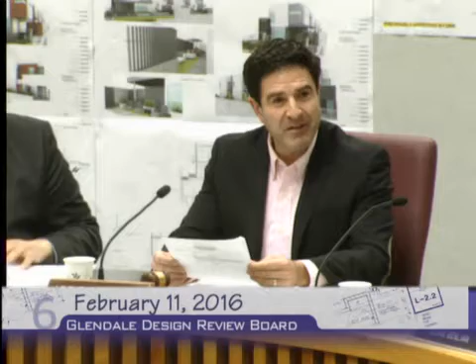Good evening and thank you. The applicant is proposing modifications to a project previously approved by the Design Review Board in May of 2014 for a new 4-unit townhouse-style multifamily building.

The building is located at 440 Palm Drive in the R1250 high-density residential zone.

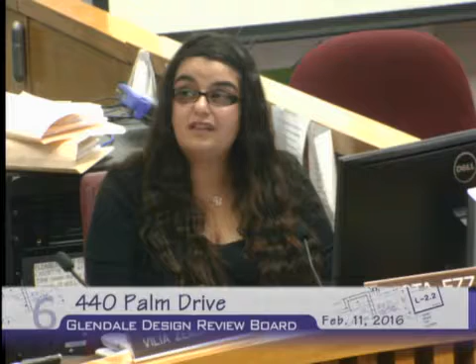The primary request is to amend the approved cladding materials from wood siding and corrugated metal to stucco for the contemporary style project. The proposed modifications could not be approved at the staff level, and they do require the Design Review Board's approval.

The proposed modifications include changing the approved cladding materials for the facade to be smooth stucco in varying colors, where the board previously approved IPE wood siding and corrugated metal wall panels.

Also changing the approved mechanical screen material to a smooth stucco wall that is flush with the building, where the board previously approved metal screening set back from the building wall.

Changing the natural stone and Corten steel planter wall materials to CMU, and changing the design for the painted metal fence and the Corten steel pedestrian entry gate to a simple metal fence and matching gate.

And changing the design along the west elevation to omit the protruding beam adjacent to the seating area to the north.

Based off the proposed modifications, staff is recommending the project be approved with conditions as noted in the staff report. The applicant's request will not alter the site plan or footprint of the development that was previously approved.

Privacy concerns for Unit D have been appropriately addressed as conditioned by the board when this project was last reviewed. The height of the windows at the rear for this unit have been raised and placed higher on the wall.

The entries to all the units remain along the east elevation, with each entrance recessed to achieve a covered entry area. The simple slab door is proposed to be accented in green with a frosted glass side light.

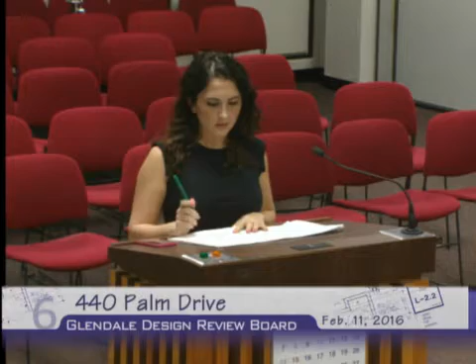Welcome. I just want to add one more item that I forgot to mention: on sheet A109, there is a green screen trellis system on the left bottom corner. That's also going to be removed, it just wasn't updated in the plan. It's actually along the back wall where the seating area is, on the side where the patios are for each unit, not where the entrance is on the other side. That's just another item that was going to be removed.

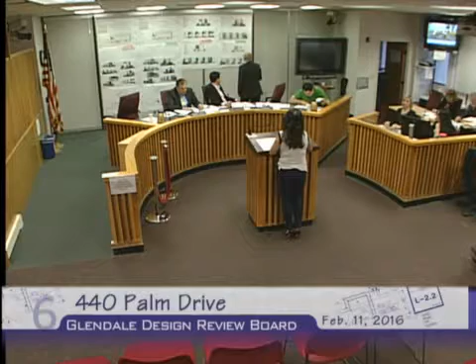Do we have questions for the applicant? Actually, I had a question. I noticed these gadgets here - I'm assuming these are all the AC units. Are these the AC units? They are. From that other side, I don't see it. In that view that you pointed out, it's all the way in the back against the other parapet, and it just shows on that elevation graphically.

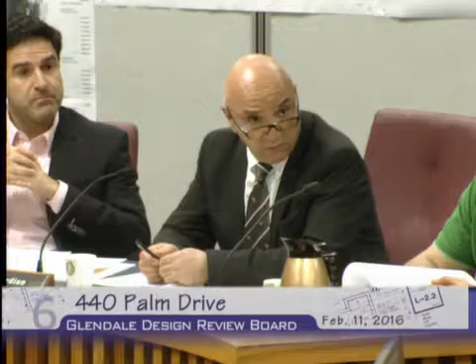But if you were to stand, the only way you could see that is if you were on the next door roof. I thought, isn't this a staff question - aren't we supposed to have at least 6 inches above, regardless of the angle? I believe so, yes. That's fine, we can raise that. It can be a condition.

Now, another thing I noticed - you've added some canopies at the entry where previously we didn't have. At the entry or on the patios upstairs? Upstairs, right. That's a new element as well, to kind of break things up. Another item is the windows have dropped - they're more standard sizes as opposed to the previous design, just for cost reasons.

What was the reason behind changing the door colors? The red went better with the wood siding, the color together with the wood. The only reason we changed it to green is because that wood was removed. There's red tones in the wood, that's why the doors were red.

That's all my questions. And the removal of the wood, was that a cost thing? That's the main reason why we're here today too, because of the cost - value engineering. That's exactly why.

Thank you. Thank you. I have no other speaker cards. Does anybody else want to speak on this topic? No? Well, since there were no other speaker cards, there's probably no need for a rebuttal. So with that, I'll go ahead and close the public portion. Mr. Charchian, do you want to start us off? Sure.

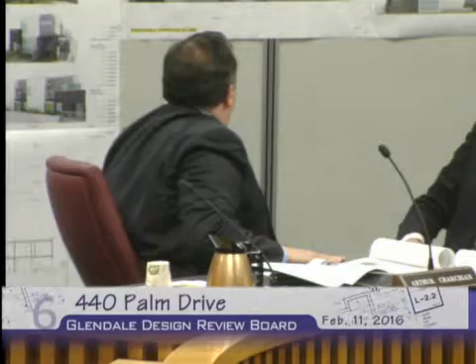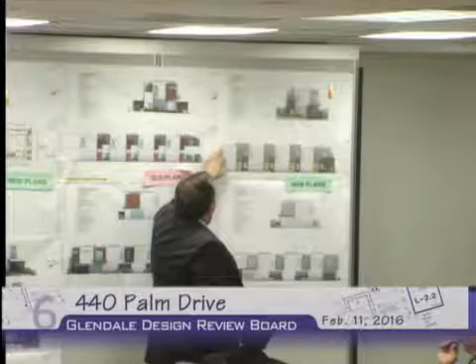So in comparing the two designs, my main concern in the removal of the cladding material and the corrugated metal material is that it opens up masses that were previously hidden in each of the 4 units. For example, here you have this corrugated material, so it breaks up this mass. Here you have 2 elements: one, the window size has been reduced, and then you have this mass here, this mass here, this mass here, and this mass here, all without any break to it. So you're looking at just walls.

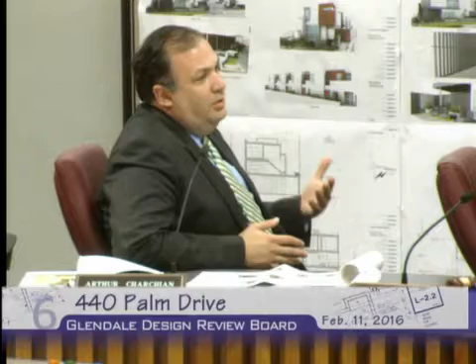I would like to maybe suggest using some sort of paint or something of that nature to create the illusion, because the volumes are just straight volumes of stucco with one window. Before, they were broken up with the metal elements that are being removed in this design. Here you had this nice break, and it was carried forward, but now that's gone. To me, that makes the project and the elevation look much more massive than I think it's intended to be. There's no articulation between what we're looking at before and now. That design had it, this one doesn't.

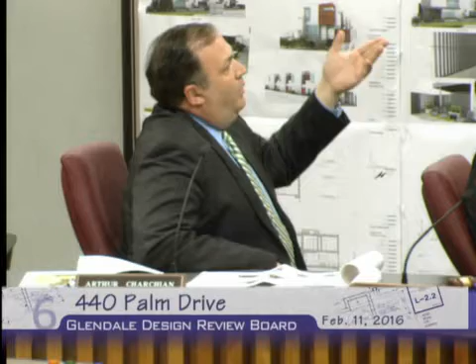I would like to see something other than just stucco. I think we need to either suggest maybe 2-tone stucco or something if we want to stick with value engineering, but I think the difference in quality of material is significant. We don't have the wood either. It also opens up the volume, the space on the second floor. But again, it's just gray stucco.

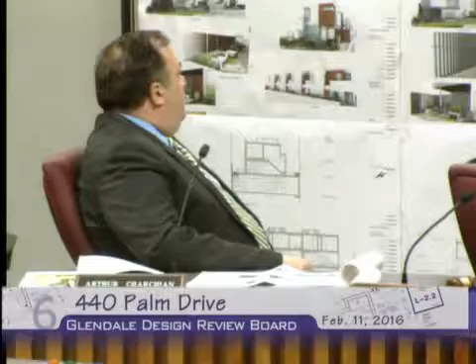In the rendering, also, you get a better sense of the undulation, with the fins coming up above the entrances and the railings, et cetera.

If I may, I don't want to take your time -- I'm looking at the previous elevation and this one. Can the board members speak up a little bit, because when you have your backs to your microphones, we can't quite catch what you're saying. No, that's fine, you can have my time.

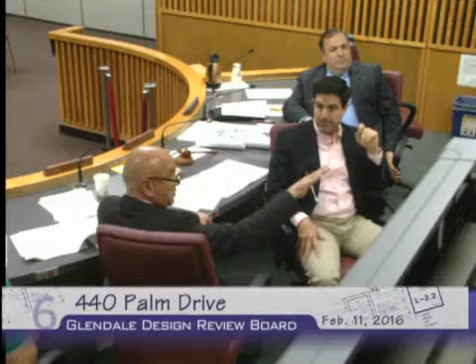What I'm saying is, when you see the previous elevation, although it's corrugated vertical metal, the color tone kind of blends in with the stucco. It's not really accentuated. So I don't know if changing the colors of the stucco would help, but aside from that, the palette seemed a little blander to me than the previous submittal.

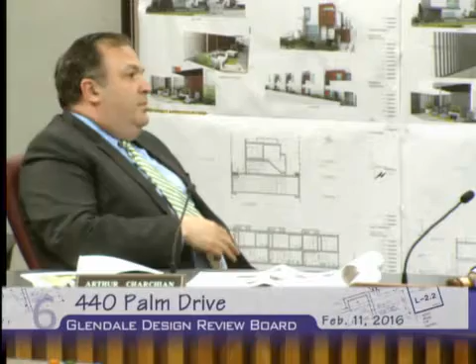That's it. Very good, Mr. Mardian.

I'm always looking for different materials on these buildings, but also I'm sympathetic to some of these cost issues that come up. And I hate to go against our design guidelines.

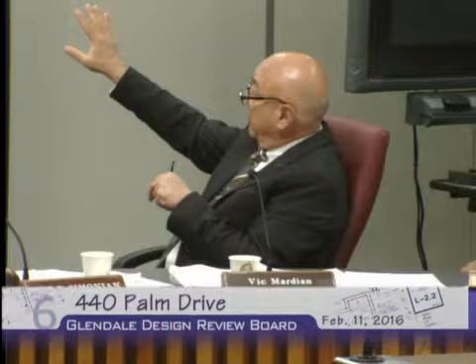When I first looked at it, I'll start with the screening. Although that material is different and shows the silhouette on one side elevation, when you come to the side they're recessed in. So I thought about whether that different material, which creates a translucent effect, really made the building -- and I felt it didn't. So I'm okay with the screening with the stucco, with the exception of the west elevation, and I think it should be raised.

Just to make sure that the screening is -- all the AC units are screened. Although when you're standing you may not see it, I'm going to go with our general practice, which is at least 6 inches above; the AC unit should be 6 inches below.

As far as the material, I did like it, I liked the building previously, but again, some of these sides, because of the undulation and all that -- except for the neighbor's side, you really barely see it from the street. So yeah, it's a nicer product.

What I was thinking is maybe at least bring the colors back to the original. Maybe that gray should be more of a brownish tone -- like a cocoa color.

Like a cocoa color, yeah. Exactly. And to alleviate that mass you're talking about, the vertical mass on all the stucco, it could be done with control joints—very thin control joints. That band could be some sort of a reglet, which has an aluminum look to it. He's gonna need that anyway because it's gonna crack.

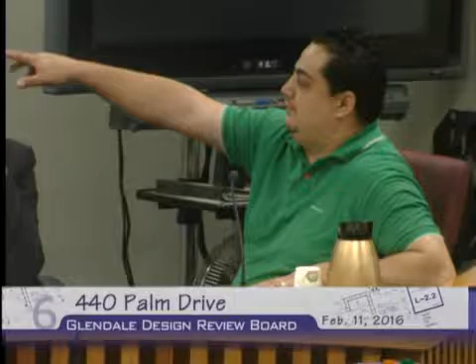Mr. Balyan: I tend to agree with Mr. Charchian and Mr. Mardian about both your comments, and I believe the comments Mr. Charchian is making stand out in the elevation views. When you look at the elevation, yes, this looks like a better treatment in terms of mass. But I think in real life, once the building is built, you're not going to see that much. The differentiation is not going to be that massive, because you're looking at a 2D drawing here. It might be a little bit tricky.

So in terms of color changes, I think if they stick with the original colors, they can still achieve the same mass, breaking the mass. And I think Mr. Mardian's idea of some control joints could also help break the stucco. Other than that, it looks good to me.

Okay. I agree, I concur with the decisions as well. I think for an overall two-story building of 4 units on Palm, which I know that street fairly well, which has a lot of nondescript kind of stucco buildings to begin with that were built in the 80s, it has quite a bit of undulation to it.

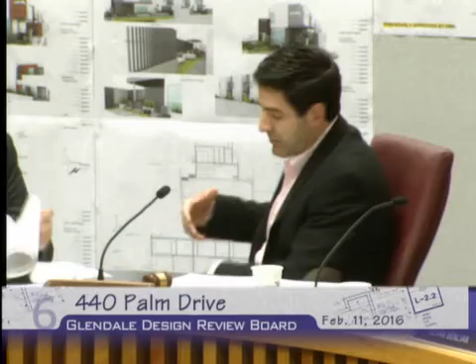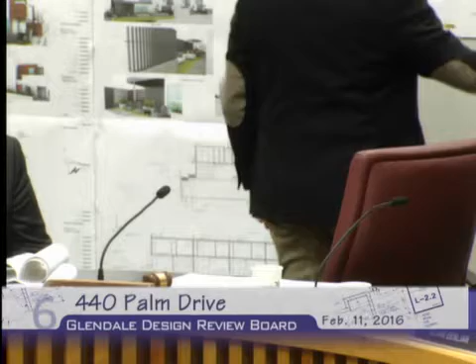And so when we look at the east view rendering, I think it gives us a good idea of the amount of undulation that's occurring there. Coupled with the railing material and the fins over the doors, I think it has most of the character that we're looking for. I do agree with both comments, though. I think if we're able to break up that verticality with some control joints, maybe a reglet, that would be more crisp and could line up with this element—the horizontal. Yeah, it might emphasize the horizontality, perhaps.

And at the same time, with Mr. Mardian's comments as well about the screening, I think we've got to be in line with our design guidelines. So I support the project as well.

If staff could just ask for a little assistance, since this decision is leaning towards something that's a little off from the guidelines and also from the direction we often give to applicants when we're meeting with them—if the board could give us an unofficial finding of why, in this project, because of the quality of the articulation or the movement of the volumes, you find this to be appropriate in a way that it might not be appropriate on another project, that would be helpful for us for writing up the record of decision and also in the future.

As I said earlier, I think the mass—I don't want it to be precedent-setting for other projects. I'm very sympathetic to these materials, just like Mr. Charchian, due to the fact that the mass and scale and the articulation, in this case, in my opinion, is justifiable. And as long as we can get the colors of the building back to originally, white stucco finish, then I think I can make that finding.

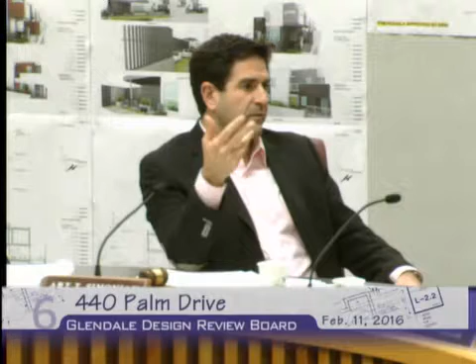So we'll change all of the colors of the stucco. The door colors should be at the discretion of the architect - if he's going with a cocoa color or whatever it is, to come up with another contrasting modern door color that would work with the new palette. Okay, we'll look for a contrasting door color to work with the new palette.

If I may add another thing, I don't know if the board members agree - maybe that will also help the mass, the copings on the parapet walls, if they should be wider, to give a little more. Is that simply just some sort of sheet metal, brake metal? Right, the drip cap could actually go with a contrasting color. Yeah, with the contrast, I was going that way. But whether or not it should be more emphasized, I leave that up.

Sorry, do we have any buy-in on that? We can give it as a recommendation, or should we make it a consideration? Consideration, yeah - consider a contrasting color on the parapet caps and possibly taller, wider, a wider flange. That's everything? I believe so.

Okay. Does someone want to entertain a motion? I'll make a motion to approve the project with the conditions. A second.

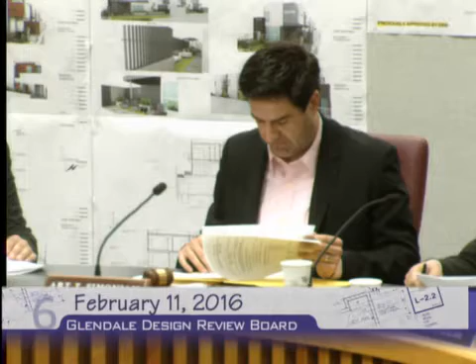So we have approval of the minutes from January 14. Do we have a motion? I'll make the motion. Second. I have a motion to approve the minutes from January the 14th. Motion made by Board Member Benlian and a second by Board Member Mardian.

In terms of a roll call: Board Member Benlian? Yes. Board Member Mardian? Yes. Board Member Charchian? Yes. Chair Simonian? Yes. Motion passes 4-0. There are no other items on tonight's agenda.